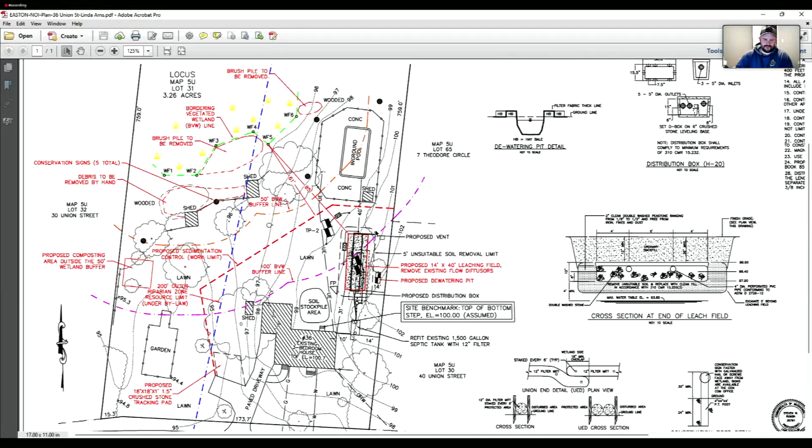I assume we can see this. We can see it. Cool. For the record, Peter Lyons with Collins Civil Engineering Group, here representing the owner. This is a repair on a failed 3-bedroom septic system.

Quick overview of the property. We got wetlands to the rear delineated as flags 1 through 6. The 50-foot and 100-foot buffers are shown on the plan, with the 100-foot cutting just behind the back of the house and through the proposed leaching system.

As we try to do, the system is pushed as far away as feasibly possible from the resource. Between all the utilities out front, there's just not enough space. So basically what we're proposing is a new septic tank to a pipe and stone leaching field in the back of the house.

This is going to be in an existing lawn area. The tree line is shown on the plan, so the over dig of the system will be coming, just clipping into the existing tree line. Most of the vegetation removal is outside of the 100-foot buffer. Anything in the 100-foot is existing lawn area. There'll be a very minimal grade change in the back of the leaching field, probably looking at about a half a foot.

We're proposing erosion control starting at the paved driveway being the project access. That's going to wrap all around and end at the property line.

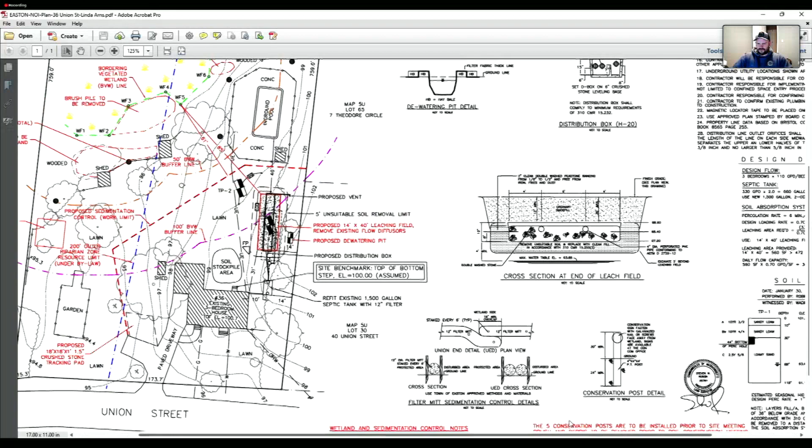That's about it. Any questions from the commission? Peter, could you just walk us through the things that are being removed from the wetland? Because there's a couple different patches and I had a hard time understanding exactly where and what things are.

Sure. So I haven't personally been out to the site in a while. Maybe Jennifer could speak better to it, but I can just see that we show some brush piles along the wetlands. There's one by flag 6, and then it looks like the general area between 3 and 4. There's some more, and then additionally behind the shed, some debris, I would imagine just construction debris or something behind that shed.

So we're just more or less trying to clean up the area between the existing tree line and the resource. I don't know if Jen had anything to add with that.

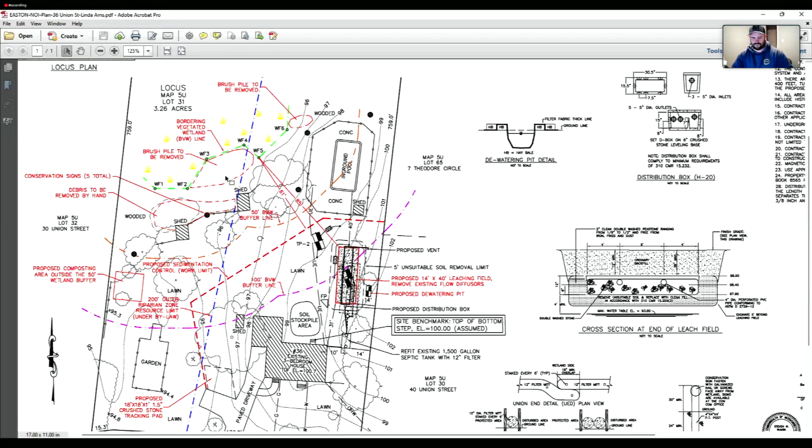No, just that all the debris between wetland flag 2 and 5 is actually in the wetland, and it's more than just a brush pile. If you look underneath the brush that's on top, it's been there for quite a while, so it is actually fill in the wetland. Otherwise, that's correct. And there is a new location proposed for composting.

Would a wetland seed mix be appropriate? Yes. Peter, any opinion on that? If we condition wetland seed mix, particularly in the area between 2 and 5? No, that seems reasonable. Okay.

Jennifer, any additional staff comment on this? No, all the other comments that I made about sediment control or anything on the plan have already been made, and we have the revised plan, so you're ready to close. Okay, comments, questions from other members of the commission?

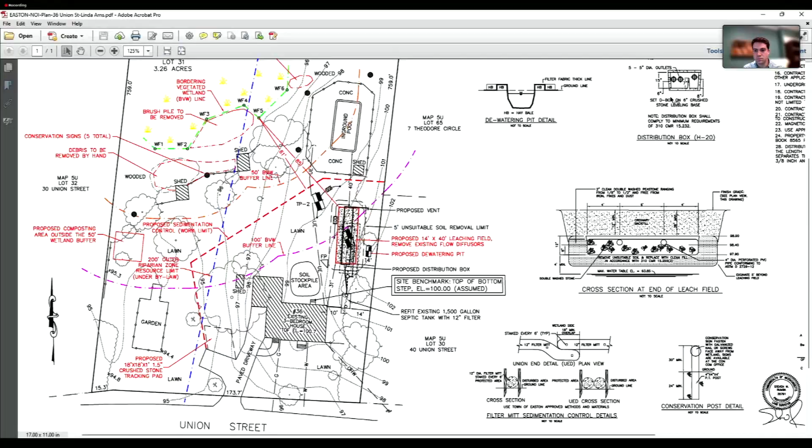Seeing a resounding shrug. I assume you, I should ask, any comments from members of the public? Seeing none, Peter, I assume you'd like to close.

Motion to close the public hearing for 36 Union Street. Benson, second. Carol motion, Benson second, roll call vote. Benson, aye. Carol, aye. Rossman, aye. Hopeful's aye. Spady, aye.

Motion to issue a permit for work and order of conditions for 36 Union Street. Rossman, second. Carol motion, Rossman second, roll call vote. Benson, aye. Carol, aye. Rossman, aye. Hopeful's aye. Spady, aye. Thank you, Peter.

See you soon. I got one more, I think, up next. Calling the next order of business of the Conservation Commission, 585 Turnpike Street, Ryan Mundins, Collins Civil Engineering Group, representative, notice of intent for upgrade of a residential septic system. You were correct, Peter.

Again, for the record, Peter with Collins Civil Engineering Group, representing, I guess in this case, the condo association. This is 585 Turnpike Street, also known as Tara Court. This is the northern section of the apartments, on the west side of Turnpike Street.

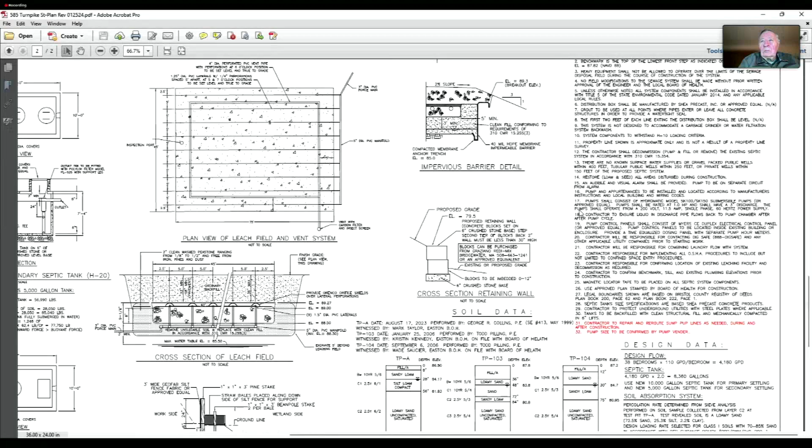How many units is this? Go around the plan here. It's 38 bedrooms is the design out here.

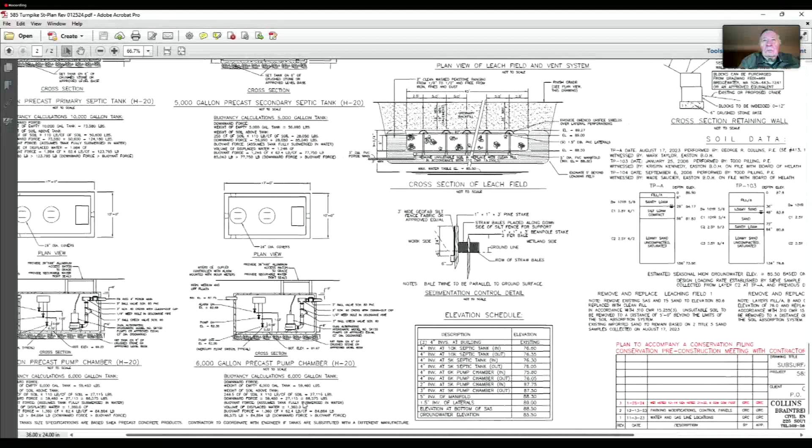So we're looking at a flow of about 4,200 gallons a day. And the plan is to replace the existing leaching field exactly where it is? It's going to be relatively the same area, but it's actually going to be 2 leaching fields, almost double the size of what's out there currently.

The existing leaching, as mentioned, is outside of jurisdiction. That's all occurring in existing lawn area, light vegetation along the street. Unfortunately, most of the intensive tank work and stuff is right up near the wetlands. So now this is kind of what we're looking at here.

So to be candid, Peter, I've never seen a raised system quite like this. Or what is on top of these? I mean, is this impervious area being added? No proposed impervious. I guess technically the tops of the concrete wall would be impervious, but between the cracks, it's just gonna go where it would anyways.

The tanks, they're gonna be loam and seeded over, same deal with the leaching field. This is an existing lawn area, like a playground area currently. So currently pervious, it's gonna be loam and seeded to finish, so no big changes as far as impervious numbers go.

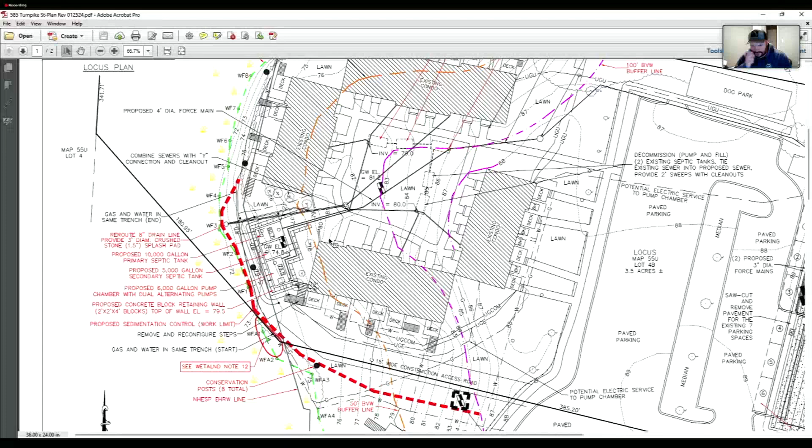And where are you at with the Board of Health on this? That's a good question. I have not been before the Board of Health for it. I know we're anticipating approval. There's really not many options out here, so this is just the best we can do situation. We do have a meeting on site tomorrow with the clients, but we don't expect any design changes as a result of that.

Jennifer, I think there might have been some staff comments going back and forth that we're still waiting on. Well, there are a number of comments in the initial staff report. I think George submitted some information Friday. Peter, do you have that? Yeah, I do have the responses to those. Do you want to tick through that pretty quickly? Yeah, I'll just abbreviate it.

The first comment was to add a land surveyor stamp. That has been added and submitted. Comment number 2, the property manager contact information was updated on the wetland forms. Book and page references were verified and amended on the order of conditions application.

Questions about grading around the retaining walls. As I mentioned in my report, there will be minimal grading around the retaining walls. The point of the retaining walls is to help us minimize the grading footprint. No real changes in surface water flow. Everything goes from uphill to downhill towards the wetlands.

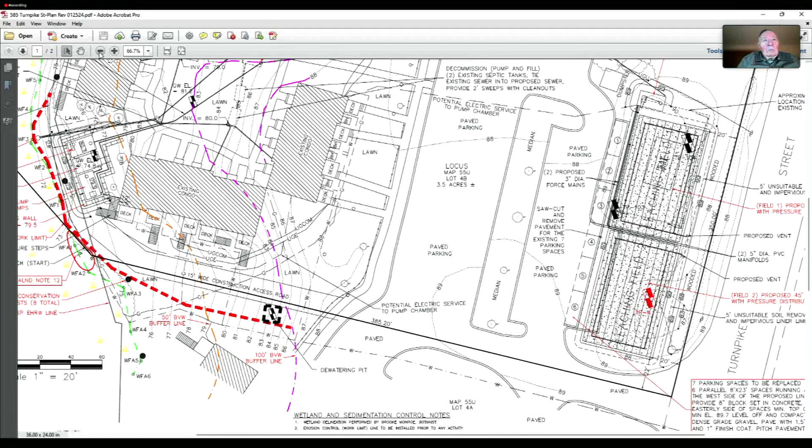It says it was added, I do not see it yet. Apologies, but it is a busy plan. All the way back, take it up to top near wetland flag 11. You can see it just beyond there. Ah, there it is. Good, thank you. Okay, yeah, that's a sneaky one.

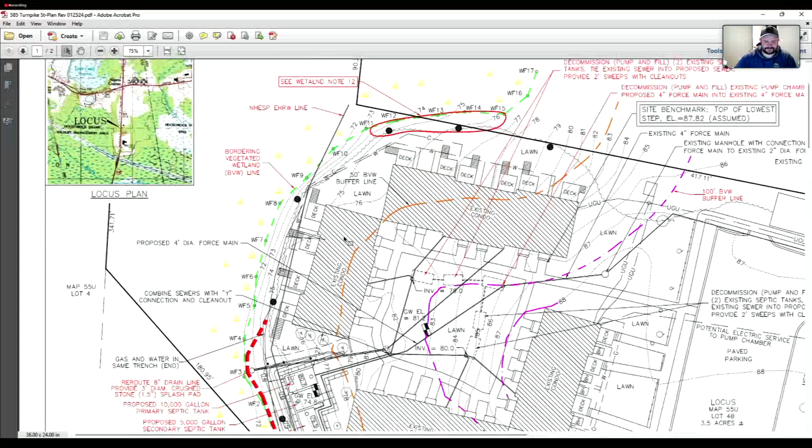Yeah, so it looks like - nailed that, Rory - it runs right along the bottom of the slope. As far as I can see, and then straight down, it kind of parallels the wetland line.

Going back to the staff report - there's a question about some discharge pipes towards the wetlands. A lot of these units do have existing sump pumps. As mentioned, there's existing high groundwater that there's really nothing we can do about, so there are sump pumps in multiple units. The water exiting the pipes is clean, there's no risk of oil or stored chemicals entering it since it's supplied by natural gas, so we're not worried about oil tanks or anything in the basements.

We've proposed a crushed stone pad at an existing drain outfall location down by the proposed tanks. That will help slow the water down and reduce further scouring before the wetlands. Let me put the mouse over that so you can see where it is - there's existing drain structures right here, a catch basin that runs out to an outlet, looks like an 8-inch drain line. So we've just proposed a small splash pad around that before it enters the wetlands.

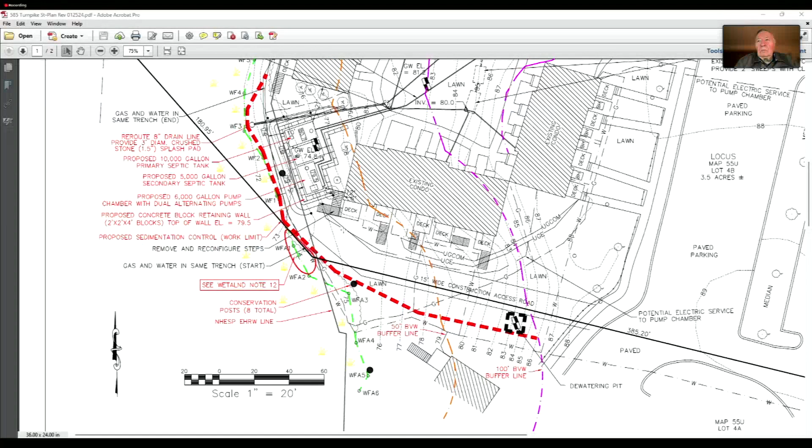Let's see... I think that was it. Sorry for the tediousness of that, but if the commission has any questions.

Just have two new ones. So the parking lot, there's no plan to redo the parking lot, correct? Nope, we're basically proposing a force main that's going to wrap around the existing parking.

So this is the northern end of the parking here. We're basically going to trench right behind it. We will be excavating a small amount of pavement, and it looks like just straightening out the gutter line and putting in some new parking spaces.

We lose 7 parking spaces along the southern leaching field, so we're going to basically take out the eastern edge of the existing parking and modify that a little.

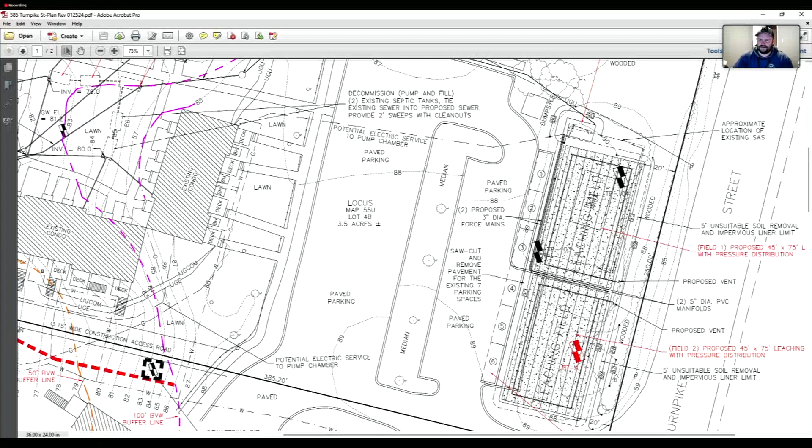Honestly, between construction and everything, this area is kind of going to get blown out anyways. So it looks like we'll be removing about a 1-to-1 ratio. We'll be taking this area of pavement and putting in pavement here. So again, outside of jurisdiction, but no real increase in impervious surface.

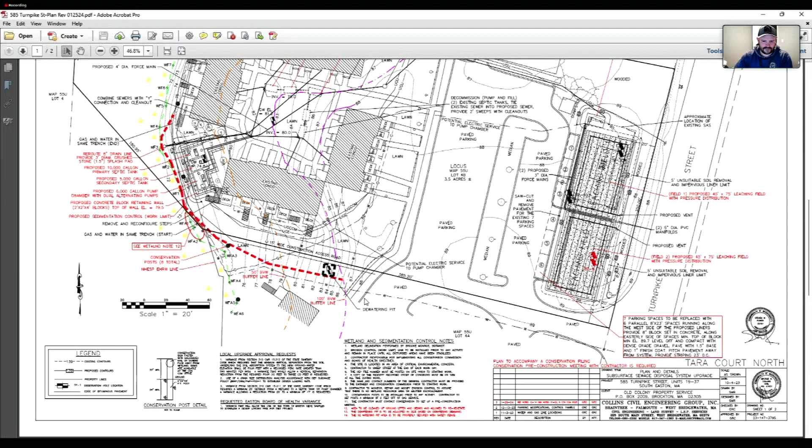Okay, and then the last one, you said the retaining wall was 5 to 6 feet tall. Do you need a railing or a fence around that given the height? Yeah, I think we do. There should be a note somewhere in here. I think it's anything over 30 inches or 3 feet that requires it. I can poke around on the plan, but that's okay, it's just a question that came up when you mentioned it. That actually takes care of all of my questions.

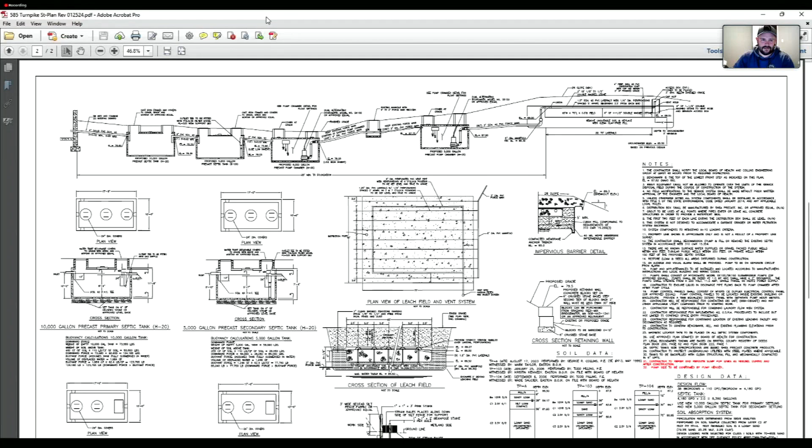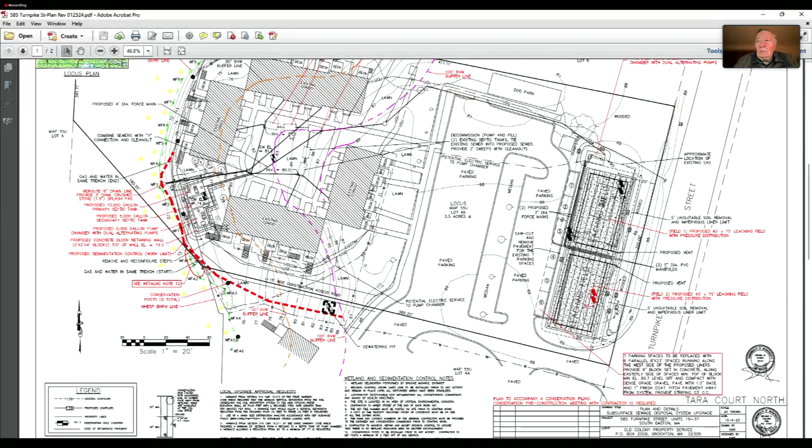Thanks, Peter, a quick question. Are you going to clean out the tanks before they're abandoned? Yeah, the existing tanks, typically what will happen is they'll be pumped and filled. As mentioned, we're going to try to dig back a little bit, so ideally we would excavate, tie everybody into the new tanks, and that would stop the flow into the existing tanks. Then we'll be able to pump those out, fill them with clean sand so they're totally filled of any voids. Usually they'll crush in the tops or make sure they're well filled in, covered up, sealed up, and abandoned in place. Yeah, thank you.

Comments from any other members of the commission here? I'm good.

So Jen, it sounds like we have what we need to close, or are we still waiting for additional comments on the plan? No, I think you're ready now. You didn't have a draft set, but it'll be pretty much a basic boilerplate set of conditions. You might need a few extra markers, but otherwise it'll be the standard set of conditions.

Comments from members of the public concerning 585 Turnpike Street? All right, seeing none, Peter, I assume you'd like to close.

Yes, please. Motion to close the public hearing for 585 Turnpike Street. Second. Crossman second. Carol motion, Spadia second, roll call vote. Benson, aye. Carol, aye. Crossman, aye. All falls aye. Spady, aye.

Motion to issue an order of conditions and permit for work for 585 Turnpike Street. Benson second. Carol motion, Benson second, roll call vote. Benson, aye. Carol, aye. Crossman, aye. All falls aye. Spady, aye.

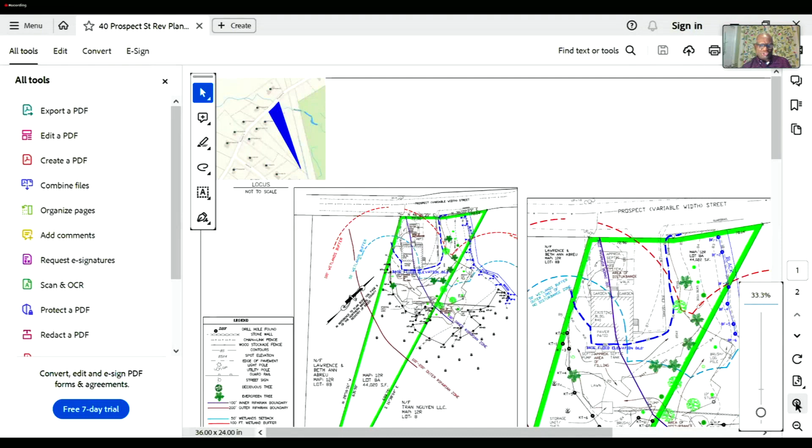So what we have here is the existing conditions. We prepared this plan in response to a request by Mr. Hines, William Hines, who purchased the property. I'm not sure if he's joining this meeting. He's a young plumber trying to start a family, has his own little business that he operates and runs a very clean operation. He purchased this property a little over a year and a half ago, if I'm not mistaken. Right here is basically a blow up of the existing conditions.

He has the existing house right here, and about 3 years ago the septic system was upgraded because the existing system had failed. So this whole area, we've identified some of the trees that existed, and this area apparently was disturbed. He had a storage unit shed here, and some lawn area.

So this whole area right here is pretty much the active use area. Right here is the existing driveway, and there's a lot of stairs that leads into the house. As you can see, half of the property is dominated by wetlands resources, including the riverfront associated with the Black Brook that flows in a southerly direction.

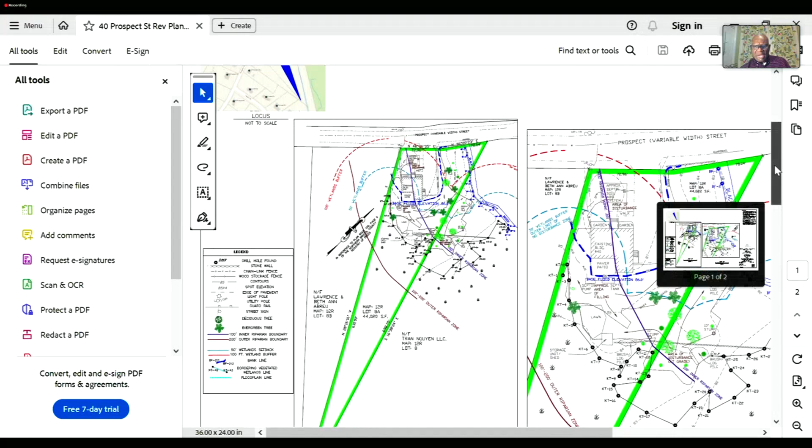So what we have done is assist Mr. Hines with preparation of a plan. Now, this hearing - and I appreciate you indulging us - was supposed to have been held back at the beginning of the month, but I traveled out of the country for a funeral. So Jennifer accommodated us and allowed us to be on this particular agenda.

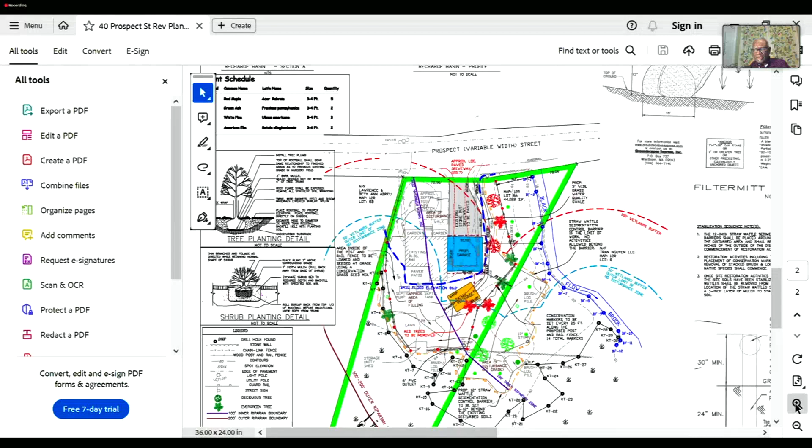And so there has been a lot of disturbance right through this area here. Let me blow this up a little bit more. Okay, so there has been some disturbance in this whole area right here, this area right here, right through here.

And what Mr. Hines, obviously, like everybody else that buys a new property and is trying to start a family, got excited and did some work. I believe Jennifer went by, observed what was going on, and issued an enforcement order. Bill has not done any more work on the property since receiving the enforcement order, as far as I know.

So what we've shown here is basically the trees that are in bad shape and hanging precariously around the house - those are proposed for removal. We're proposing a bunch of new trees put together by Mr. Ken Thompson, who delineated the wetlands resources and proposed some tree planting details and specifications. I am not a tree expert, but he has done a fairly good job.

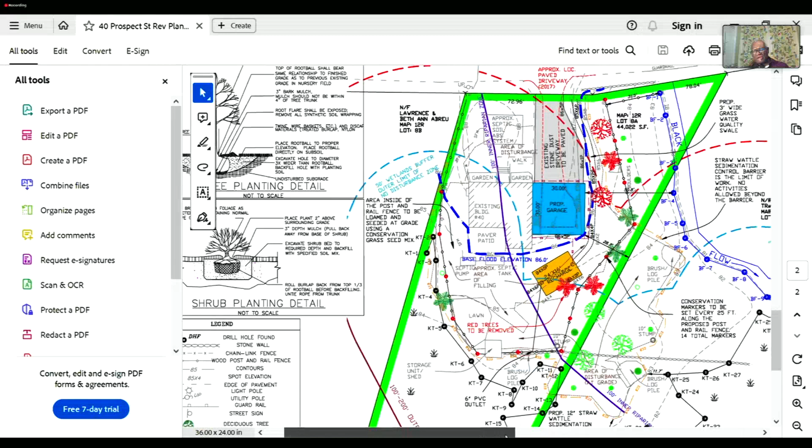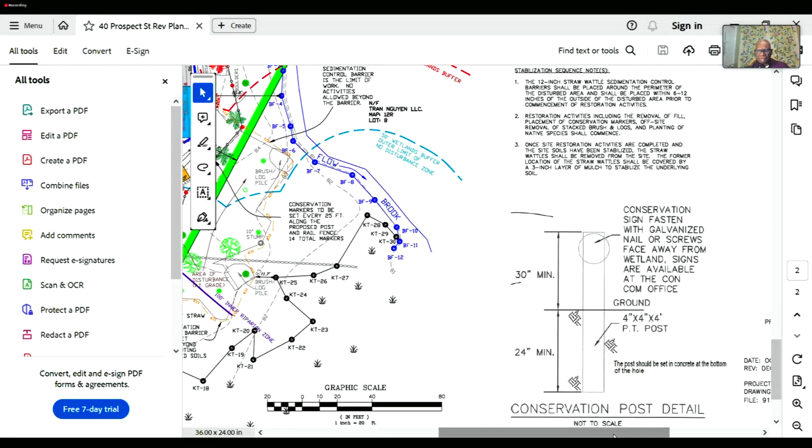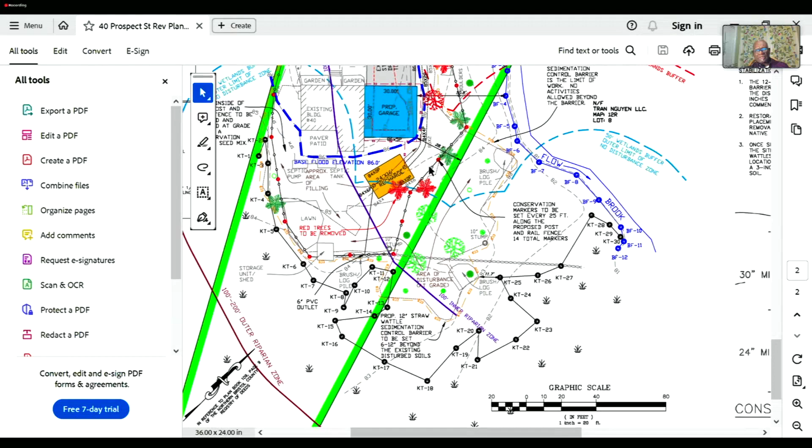If you recall, the one he did on - I'm going to bite my tongue trying to pronounce it - Pocasset or Pocatincan, I forgot how to say that name, but he put together a good plan. What we've also proposed is a permanent use area in terms of providing a visual barrier. So what you see here is a proposed post and rail fence coming through here, up to here, and then cutting off right in here so that this area is the area being utilized.

Now, the question is, has there been a lot of fill put on the property?

Because of the way the dirt is spread all over the place, it's very hard to say it was 12 inches or 2 feet, but based on hand digging with a shovel without the benefit of a bobcat or a backhoe, I can tell that what I've seen is anywhere from 6 inches, 4 inches around this area, and about a foot right here, but then it thins out in this area.

So what we're proposing to do is put this garage so that it provides a physical limit for where his truck can pull in and park and be out of sight. And then he also has a contractor's truck that he uses to service homes with his plumbing business.

We're also proposing permanent conservation markers, and we have a detail here for those conservation markers. Right over here, highlighted in orange, is a 24 by 16 stormwater recharge area to provide recharge for the garage. The volume calculations we submitted clearly demonstrate that a recharge system will work.

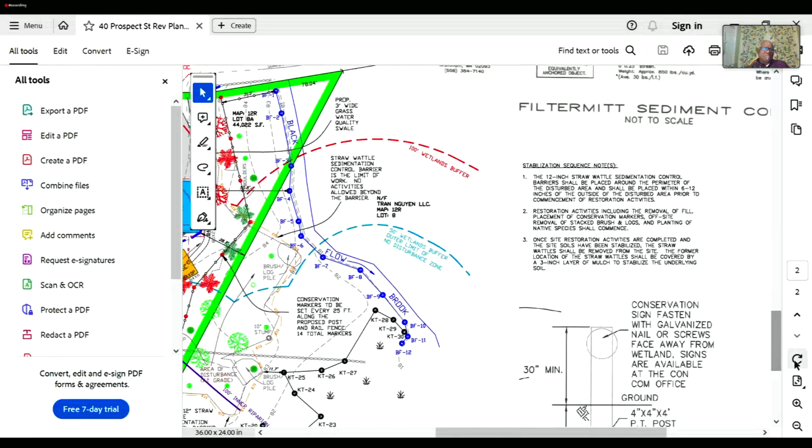We've submitted some waiver requests under the Commission's code 225, 227, to allow the work to be done. I think if the Commission were to approve this, Mr. Hines would hire an environmental monitor approved by the Commission to oversee the cleanup, the planting, and the tree removal work, and will provide our reports as required.

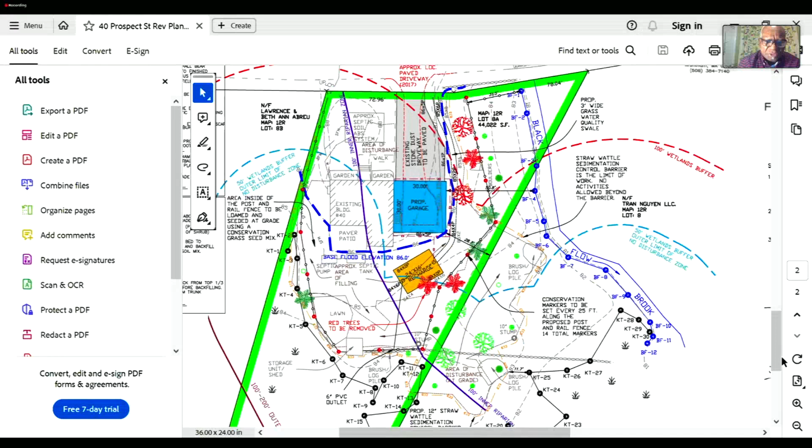Now, we did receive a detailed report from Jennifer. I believe some of the responses we provided in the revised narrative address some of those comments. But I think I would want to hear any other comments that the Commission may have, and then the public, and then we can request a continuation to allow us to provide a more comprehensive response to both the Commission's comments or questions, as well as the detailed report that Jennifer put together.

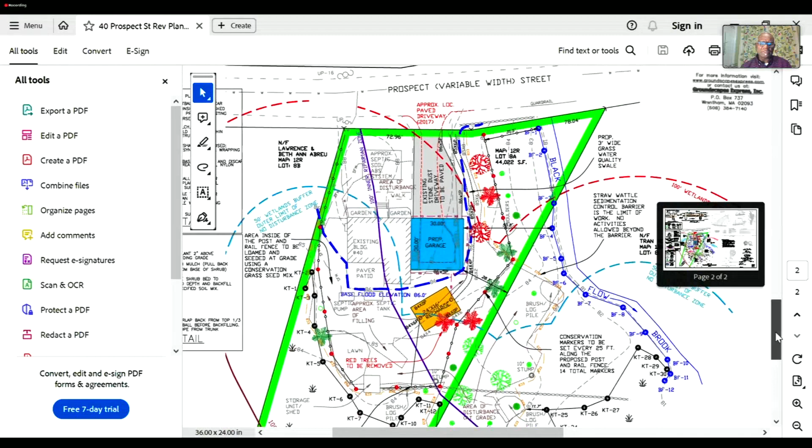And I'm still trying to adjust to my jet lag and everything else. So definitely requesting a continuation will be part of this presentation, just so that we can articulate in more detail a response to your comments as well as Jennifer's comments. Thank you.

Jennifer, would you mind starting with staff comment on this? Sure.

As was mentioned, this filing is the result of 2 violations, one that resulted in an enforcement order. So we are certainly glad to have the application before us. But there are a number of comments. I don't think you touched on all the resource areas for the property, did you want to go over those again?

So we do have the riverfront, basically the property, if you look over here, right here, the whole property, this is the 100-foot inner riparian. This line that I'm following right here is the inner riparian boundary of the riverfront. So you can see that this whole area is in the riverfront. Well, the 200-foot riverfront obviously goes beyond the property, so basically the entire property is in the riverfront. It is also located in the ACEC, an area of critical environmental concern.

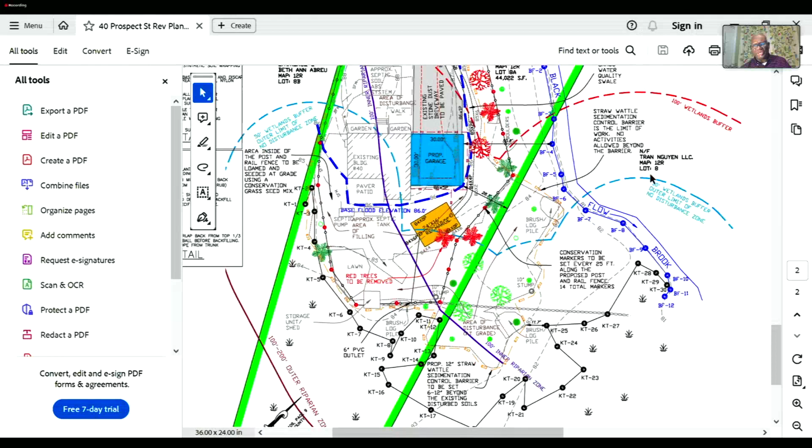And then the other resource is a bordering vegetated wetlands, which is basically right here, flagged by Ken Thompson. I believe it starts right here, KT1, all through here to KT30. And then it has a 100-foot buffer zone associated with it, which is highlighted right here. That is the 100-foot buffer zone for the BVW.

And then there's a 50-foot also buffer zone associated under the local Chapter 227 associated with the BVW, and that is this lighter blue line here, coming along here, right through here. Yeah, I believe those are the resources, Jennifer. And yep, just bank, that's it.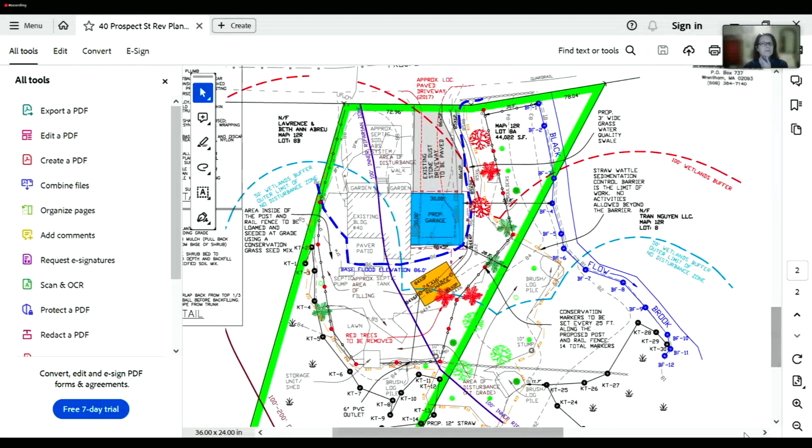Okay, so most of the comments that I had are due to the fact that all of the grading in the violation area was actually in the floodplain. There's new fill in the floodplain. Most of the comments have to do with that. The driveway, we're also in the ACEC. The driveway appears to have been 8 feet wide in 2017, and now it's about 25 feet wide. So that is additional pavement within the floodplain area.

The restoration area only lists trees, but it should include shrubs and herbaceous cover. The amount of alteration and filling should also be on the plans. The waivers should be on the waiver forms that were provided.

A lot of the comments still remain. Proposed stormwater management: it looks like portions of the swale and the infiltration area are in the floodplain, so I don't know how that would work. And the other comments about the 25-foot, I mean, a minimum of 25 feet, no disturbance areas required, even just for pollution control. You have a 50-foot no disturb area, and the proposed alteration is up to or within 2 or 3 feet of the wetland.

So I understand you're going to be providing written comments, a written response for all of those comments, and then we can take a look at those when they're submitted.

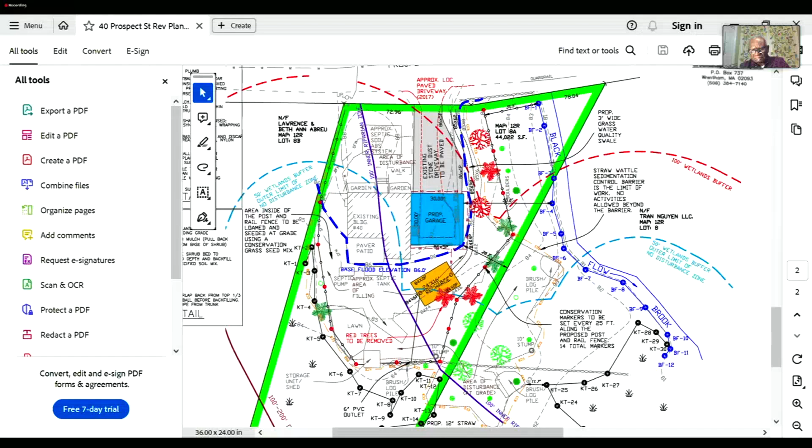Any other comments from members of the commission? Comments from members of the public? Seeing none, as I assume you'd like a continuance?

So if we can continue to about a month away, and then in the meantime, I will reach out to Jen's office tomorrow or Wednesday to see her availability to come out and meet with us to do the exploration work. And then your choices are March 4th or March 25th. Okay, we probably should do the March 4th. Okay, and then I will know where we are two weeks before then.

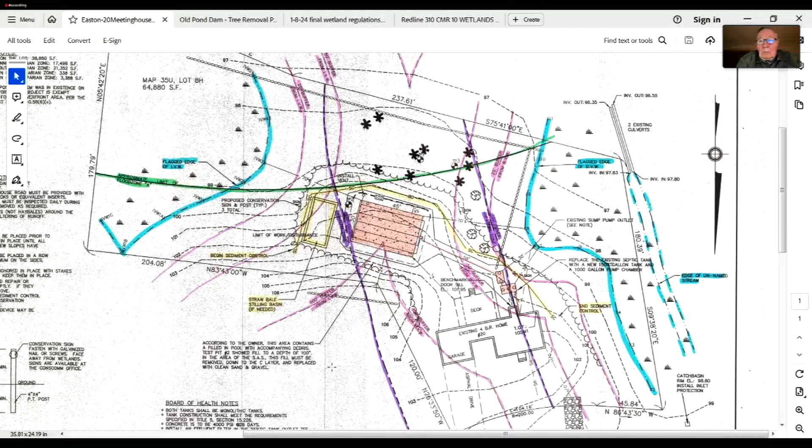So for recap for the board, this was a situation where we're having questions about compensatory storage. And this has sort of been abated by the fact that it's no longer going to result in any change to the floodplain. Questions or comments from members of the board? Seeing none, questions or comments from members of the public regarding 20 Meeting House Lane?

Again, seeing none, motion to close the public hearing for 20 Meeting House Lane. Crossman, second. Carol motion, Crossman second, roll call vote. Benson, aye. Carol, aye. Crossman, aye. Caulfield, aye. Spady, aye. Motion to issue an order of conditions and permit for work for 20 Meeting House Lane. Caulfield second. Carol motion, Caulfield second, roll call vote. Benson, aye. Carol, aye. Crossman, aye. Caulfield, aye. Spady, aye.

Easy enough. On to our next order of business, request for amendment, 16 Goodspeed Lane. EB Development, Ekstrom Home Design, applicant, JK Holmgren Engineering, representative. Request for amendment of existing order of conditions for a single family home.

Good evening. Hello? Scott, how are you? How are you? Good, you? Good. So for the record, my name is Scott Rogers from JK Holmgren Engineering.

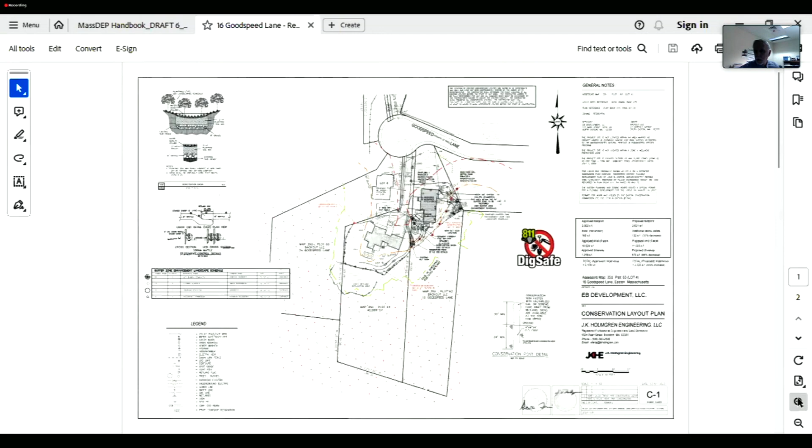I'm going to try to share my screen best I can. That or no? We can see a file folder. We do not see plans. I think you have to... what did it say? On stop sharing, then share again. That works, that's what I've heard. Worked for a zoo. If you open the files, you have to have your files open before you share the screen. Gotcha. How about now? You're up. Yes, but if you... worked again. Take that X and close out the all tools little panel, then it'll make this easier to see. Gotcha, thank you. Feel like I'm getting better at this finally. Baby steps.

So this project's been before you before. The original order of condition was issued back in March of 2022. So there's been some changes and we're requesting to modify that existing order. So that's the overall site. You can see lot 5, you were obviously here for that. 6 is also on the plan, it shows that one's under construction. And then lot 4 is the one on the right of my plan.

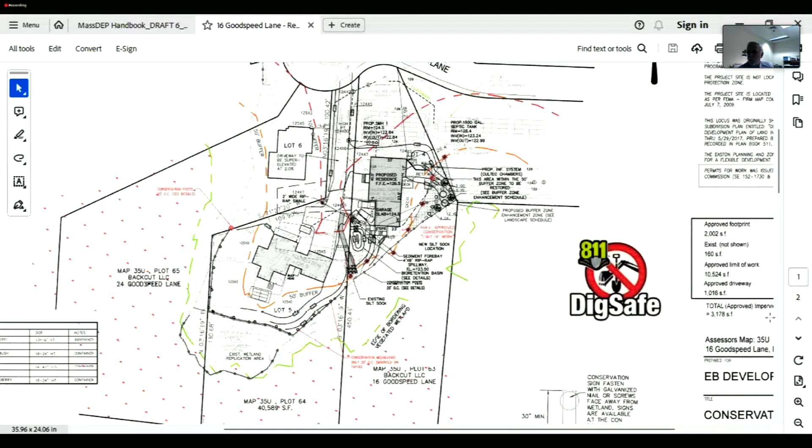I'm going to go to the blow up so you can see this a little bit better. Is that a revised plan, Scott? It is, yes. That was revised January 24th, I believe.

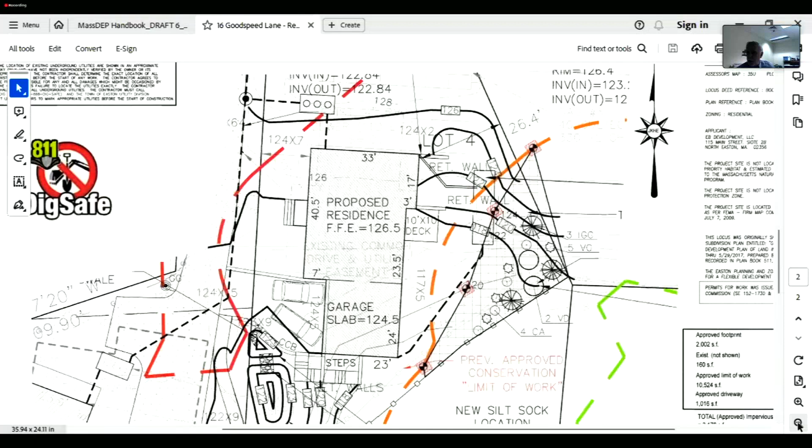On this particular job, there were some changes to the size of the residence, which did get a little bit bigger. The decks in the back are smaller than the original approved plan. Probably the most substantial change in the good direction was that the driveway got about 44% smaller. The old design had the driveway and garage on the north side of the site. This is kind of a mirrored version, but with the driveway on the north side, it had to come in at a side angle rather than straight in, so the driveway was considerably larger in the originally approved plan. This is an improvement in that regard.

There is a small increase in the overall impervious surface, about 4.5 to 4.6% from what was originally approved. To compensate for that change, the old plan had a bioretention area, and this plan adds a sediment forebay, which acts as a pre-treatment device prior to the bioretention area. That's located just to the south of the garage and driveway entranceway.

We also updated the original operation and maintenance plan. Since a couple of years ago, we've gotten comments from review engineers about different amounts of inspection reporting and timing issues, so we've updated those documents for all of our projects. We also provided a new drainage report to the Conservation Commission that analyzes the sediment forebay and the bioretention area.

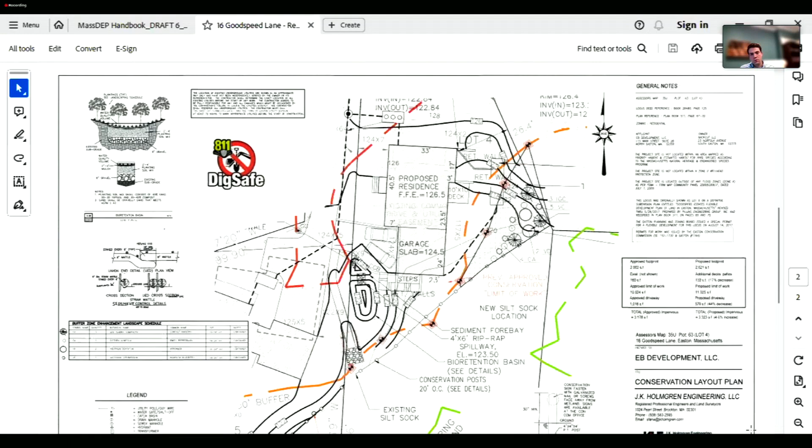Scott, could you just tell us the change in impervious surface here? Yep, let's see.

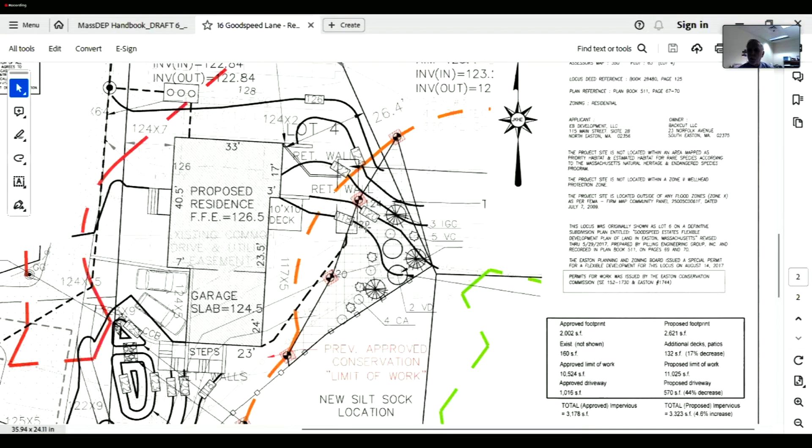The building itself went from a little over 2,000 square feet to 2,600 square feet, just rounding numbers here. The decks went from about 160 to 132, so that's smaller. The limit of work is about 500 square feet or so larger. The driveway went from a little over 1,000 square feet to a little under 600 square feet. So the total impervious went from about 3,200 square feet to about 3,300, rounding, so a slight increase. Does that answer your question? Yes.

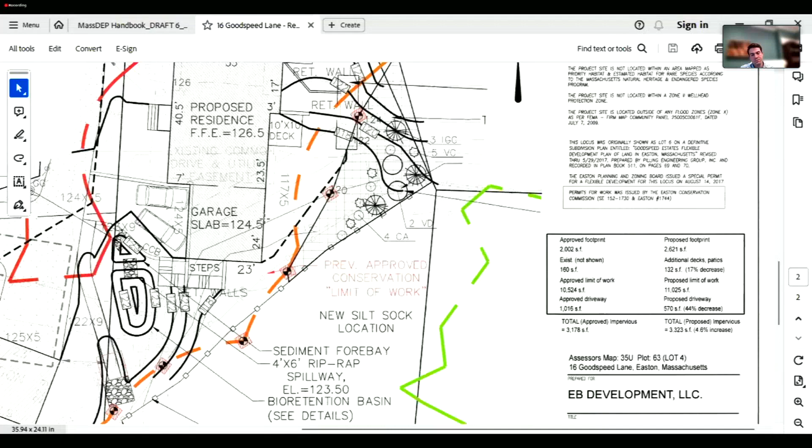Jennifer, do we have staff comment on this? Scott, did you let us know you did more revised plans in another letter? Because I don't recall seeing this plan - what's the date at the bottom of that? January 24th.

Those should all be uploaded to PermitEyes if I did my job right, along with the response letter that went with it. I don't remember seeing that. We don't always get notified when you upload stuff, so people usually send an email, and hard copies are required so we know they were done. I'll make sure I start sending emails, and the hard copy should have been delivered too. Sometimes we deliver on Fridays, or certain offices aren't there, so the plans may have gone to planning and zoning, or not Board of Health, hopefully.

Yeah, I definitely don't remember seeing this plan, especially where it says steps, and that was one of the comments - what are all those boxes over there? So all the area with those little lines and boxes, that's impervious too, isn't it? We didn't call out specific types of materials - I'm not sure if it's going to be wood with pea stone between it. It doesn't have to be necessarily concrete or paved.

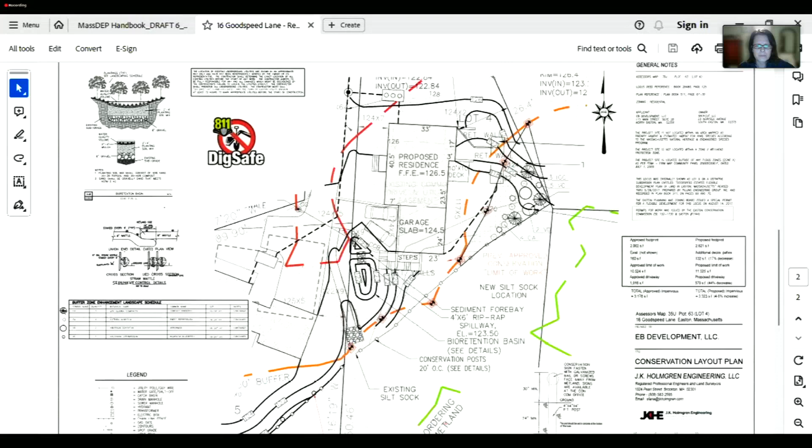Okay, well, just having looked at it tonight, it looks like you've addressed the questions, but I'll have to take a closer look and make sure we have the hard copy of the plan in the office. But it appears you've answered the questions. Questions or comments from members of the commission on this?

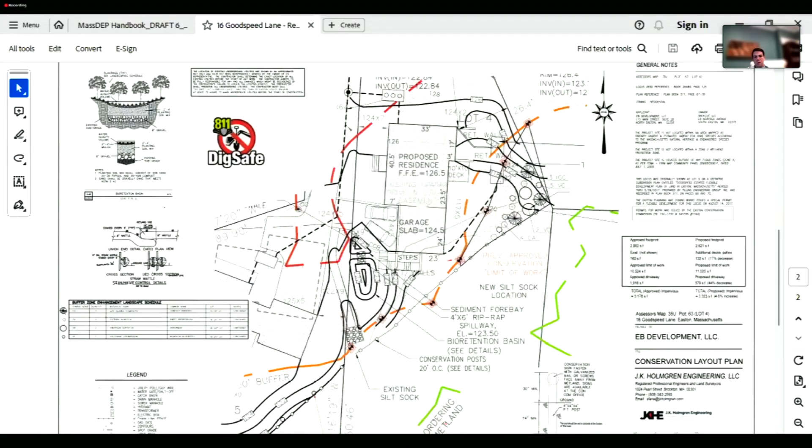Seeing none, questions or comments from members of the public on this? Seeing none. Jen, do you need more time to review this?

Sorry to put you on the spot. I'm just trying to remember if I already have a draft order or not. I don't think it was in the binder, so you haven't seen the draft order. So then, yes, we would need some more time to review this. Yeah, no, that tracks.

So Scott, I'm going to make a motion to continue this to our next meeting, which is February 12th, 2024. Motion to continue 16 Goodspeed Lane to the February 12th, 2024 meeting of the Easton Conservation Commission.

Carol motion, Spady a second, roll call vote. Benson, aye. Carol, aye. Crossman, aye. Caulfield, aye. Spady, aye.

Thank you. Thank you very much. Have a good night. Do you stay for the next one or no? That's not me, Jennifer. Okay, I know it's Ethan, but I think it's Collins Engineering.